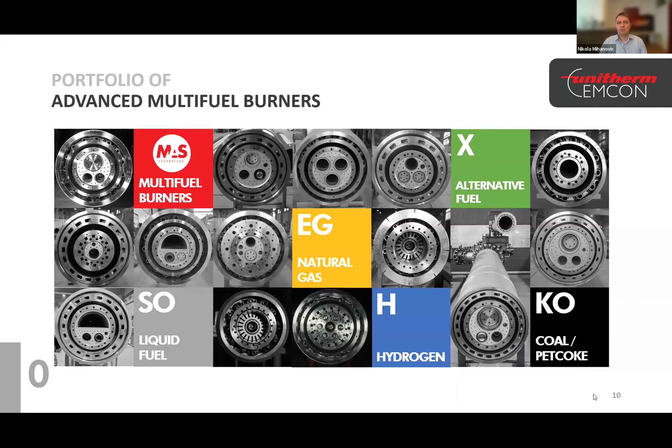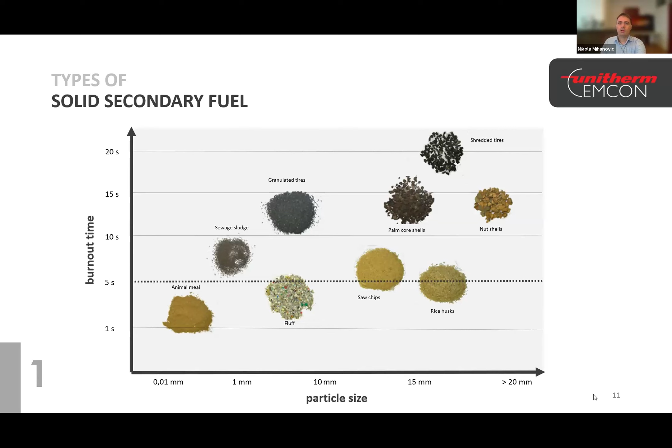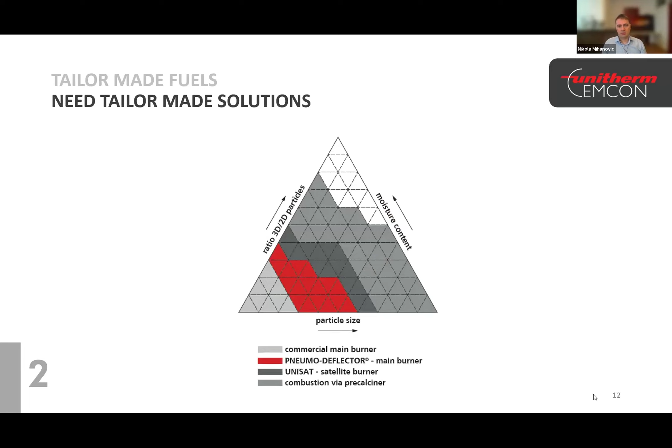We have created a small diagram to demonstrate how different firing technologies can utilize secondary fuels with different characteristics. Here you can see that with a commercial burner, which means a simple pipe through the main burner, we can handle a very small range of secondary fuels with low moisture content and small particle size. With our pneumo-deflector technology, we can handle higher moisture and bigger particle size by influencing the behavior of particles as they exit the burner. I will discuss this in detail later.

To expand the range of usable secondary fuels, the next step is the satellite burner. And this burner offers even greater flexibility in terms of moisture content and particle size. Additionally, combustion in the pre-calciner provides even more freedom as it does not require a precisely defined flame, but rather the release of heat over a longer period of time.

However, there are several considerations to keep in mind when starting to fire secondary fuels. Firstly, compared to primary fuels, we need a higher oxygen content at the kiln inlet, typically around 3 to 5%, to ensure complete combustion and to avoid presence of CO at kiln inlet.

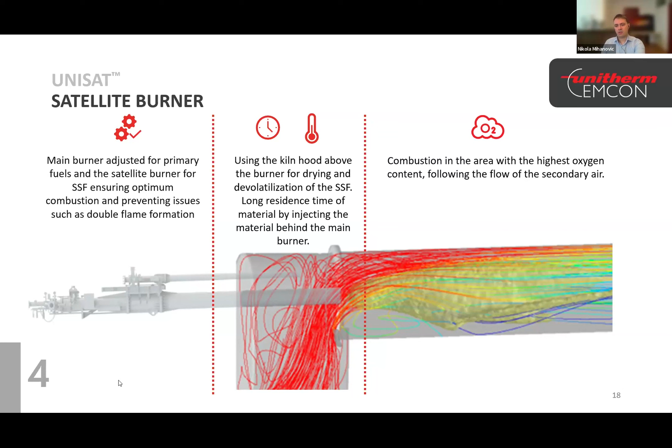Additionally, when the satellite burner is integrated with the main burner, which is capable of adjustments in any direction and which has high burner effective momentum, satellite burners improve combustion dynamics even further.

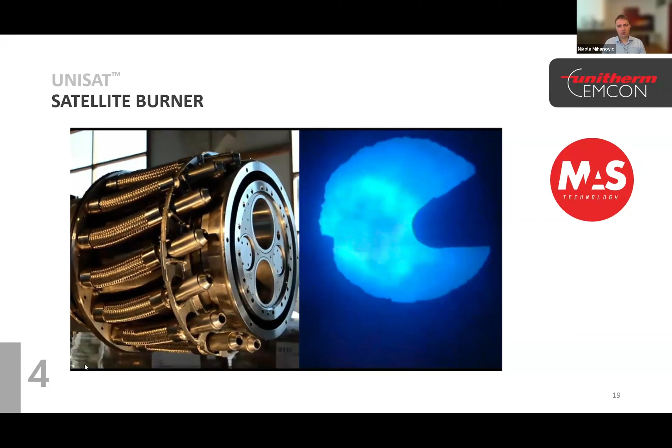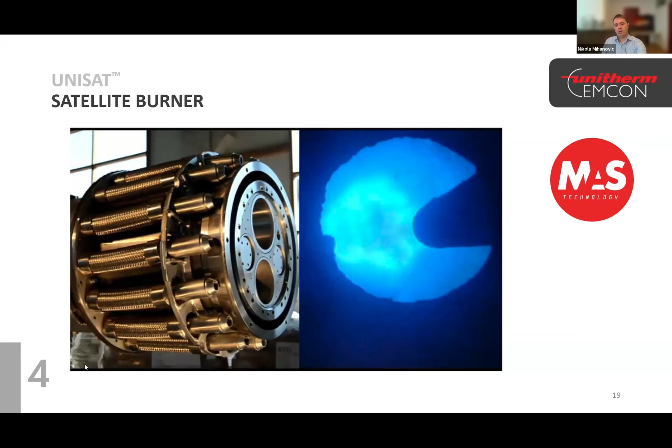Here you can see our MAS burner with flexible hoses, or in the new execution, with rotary discs, which enables us to shape the flame to perfectly respond to requirements from the satellite burner to boost fuel substitution ratio. High effective momentum, high flexibility, and fast response are key features of MAS burners.

The installation process differs depending on whether the satellite burner is coming with a new main burner or it is added to an existing one. If added to an existing burner with an existing burner trolley, then finding appropriate placement for the satellite burner becomes essential.

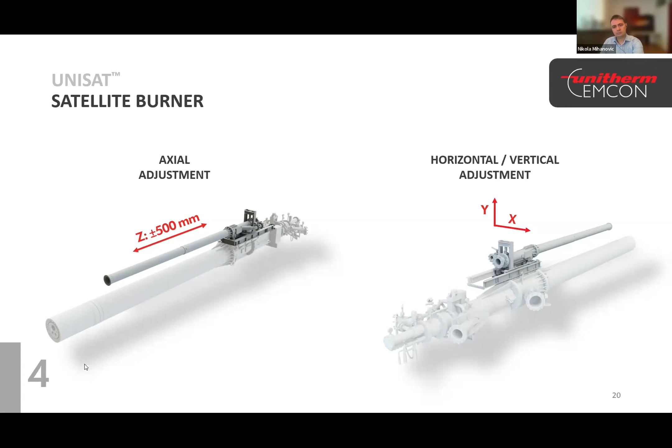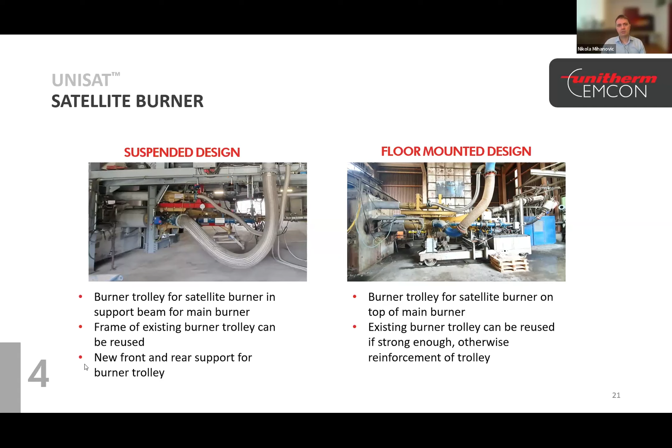With our satellite burner, we offer two execution options. Firstly, for suspended design, the burner frame can be installed beneath the main burner. This configuration frees up space above the burner for satellite burner placement. And also we have floor-mounted placement. It's less complicated as there are no obstructions above. As shown earlier, installation involves placing rails on top of the main burner and securing the satellite burner accordingly.

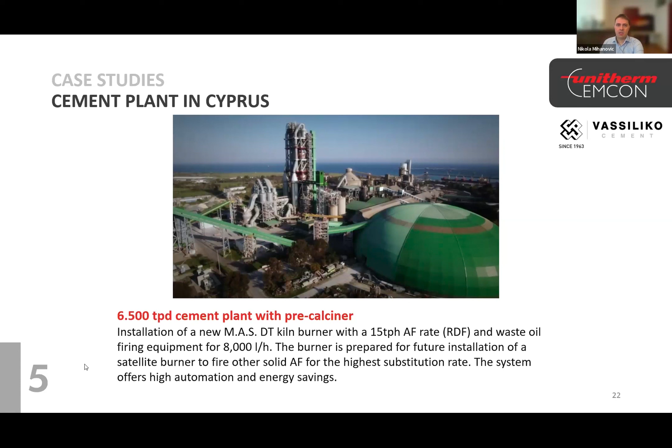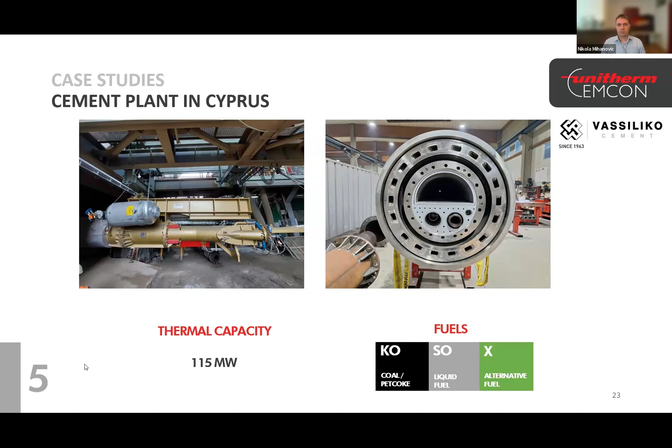Let's go to some case studies. Firstly, we have a case study from cement plant Vassiliko, Cyprus, with capacity of 6,500 tons. We installed an M.A.S. DT burner with thermal capacity of 115 megawatts, which is equipped with a secondary fuel channel with pneumo deflector, and it is prepared for future installation of a satellite burner. Here we can see burner photos. The burner is equipped with a semicircular solid fuel channel, which enables us to effectively utilize the burner size for maximizing fuel feed rate.

In this example, we started with 6 to 8 tons of secondary fuel. During commissioning and later during process optimization, we reached 14.5 tons with stable operation without impacting clinker quality.

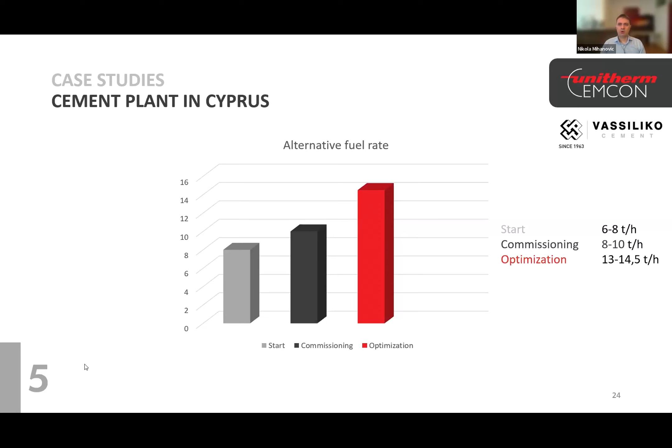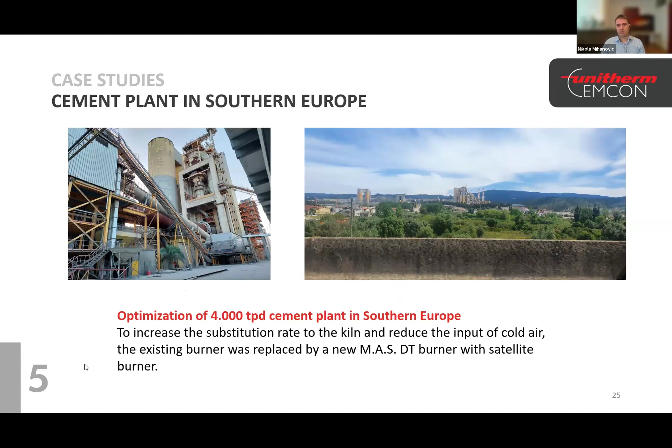We have a case study for a plant in Southern Europe. Plant capacity is 4,000 tons per day. To increase substitution rate to the kiln and to reduce the input of cold air, the existing old burner was replaced with a new M.A.S. DT burner, which was equipped with a satellite burner. With capacity of 79 megawatts, the burner is capable of firing coal, natural gas, liquid fuel, and solid fuel through the central pipe also.

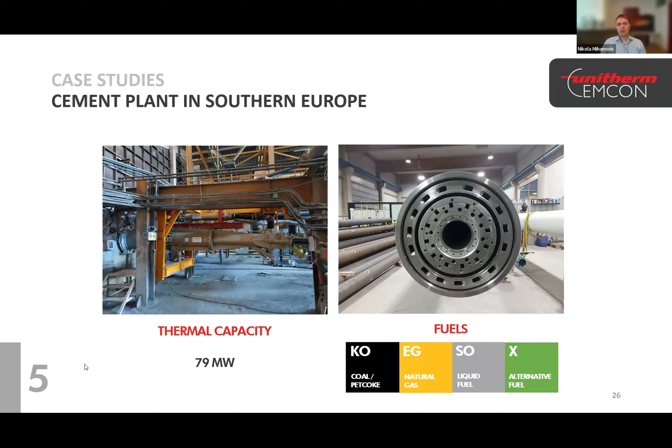With the old burner, the plant could reach a feed rate of 4.5 tons per hour. During commissioning and later during process optimization, we reached 7 tons per hour with stable operation and without impacting clinker quality.

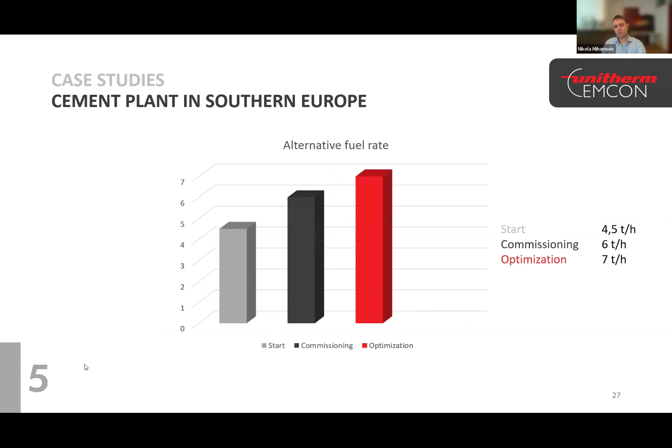As I mentioned earlier, since 2014, the number of satellite burners we installed has steadily increased. Currently, we have more than 50 satellite burners installed, with some still in project phase or under manufacturing. With only few exceptions, our clients show a clear preference for satellite burner technology, and this preference is due to several key reasons. Firstly, retrofitting of an existing system with a satellite burner can be very easy in some cases.

Secondly, when purchasing a new burner, the cost of a burner with integrated secondary fuel channel or with a separate satellite burner is quite similar. However, satellite burners offer more flexibility and greater adjustment capabilities.

I have one question commenting that with this burner, with excess air and poor combustion characteristics of secondary fuel, the NOx will also increase. That's something I have found in analysis, actually, that the more alternative fuels are used in a kiln, the megajoules per ton actually increases. The kiln becomes less efficient. So that obviously suggests that burners need to be modified when you are using higher percentages of alternative fuel, or indeed using a separate satellite burner.

Absolutely, this is clear physics or chemistry, because cold air is cold air. So any cubic meter of cold air is a penalty. It's better to utilize secondary air from the cooler instead of increasing the amount of transport air.

That's number one. Second, on average we have secondary fuels with moisture content above 10, so 10 and more percent. To evaporate the water, we need 600 kilocalories per kilogram of water. So however many kilograms of water we introduce, we need to consume heat to evaporate it. And these are the key reasons. There are other reasons, but these are the two main reasons.